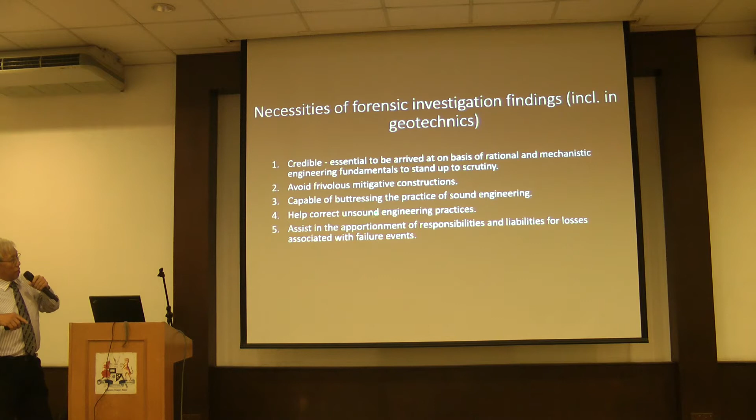Number four, you help to correct unsound engineering practices, especially established practices which seem not to result in problems earlier, but later under particular situations the practices do not seem to work. So it's time for further studies and understanding.

And number five is to assist in the apportionment of responsibilities and liabilities for losses associated with the failure events. For instance, if you are an owner of a facility, a house buyer or something like that, and your house experiences problems, you want to look for people to pay for the repairs.

In most cases, at the moment, I think a lot of people will just blame the contractors, but you have to understand that the contractor's work, before he's paid, has to be accepted as advised or certified by the supervising consultant. So actually, at the end of the day, it's the project consultant who's actually liable.

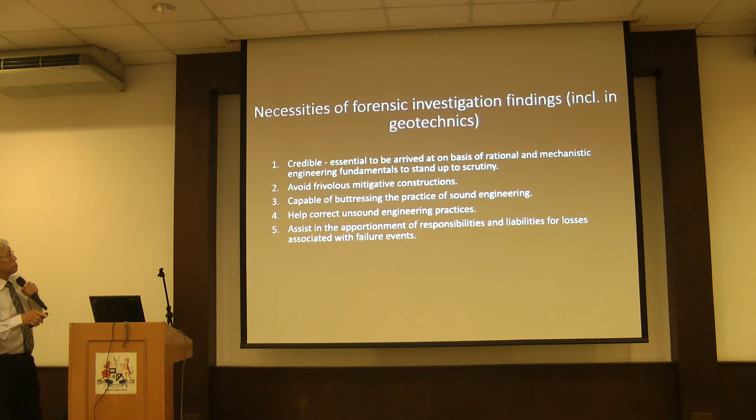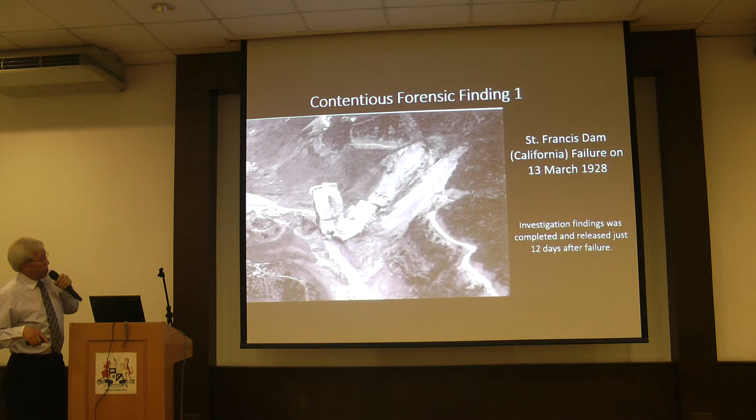So we go to contentious forensic findings. There are quite a number of them in the literature. Now, number one is the St. Francis Dam in California. It failed on the 13th March 1928. Now, interestingly, the investigation findings were completed and released just 12 days after the failure.

And this is a bit of the specifics on the dam. It was a 60 meters high concrete arch dam and collapsed soon after full impoundment. That means as soon as the water level approached the maximum reservoir level, it collapsed. And number two, failure was blamed on piping and erosion in the conglomerate foundations.

Now it's recorded that soon after this collapse, the geologists came along and they were very, very happy to find that there was conglomerate on your left-hand side and the ground was schist on the right-hand side. So conveniently, they said that it was piping under or through the conglomerate foundations that caused the problem.

But then it wasn't until a similar dam in France, Malpasset, failed. Well, this dam failed in 1959, and it wasn't until 8 years after it failed that it was realized that uplift water pressures in the foundations cause instabilities in such dams. And following that, the engineering philosophy for the design of concrete arch dams was thoroughly revised.

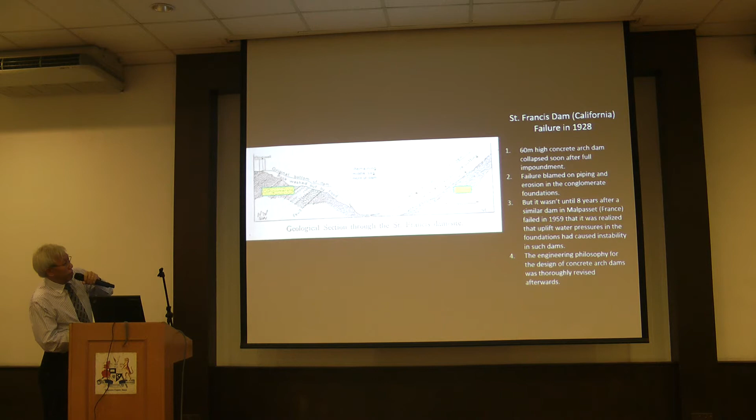So that's a benefit of that failure. But it took 30 years plus 8, so almost 40 years before they realized the fault.

Now, number 2 contentious forensic finding is the Carsington Dam failure in 1984. It was a 30 meters high earth dam, and it had a very interesting clay core geometry. This is a clay core. Normally, clay cores would just come down vertically and stop there. So this had an extra feature here, which was considered unusual.

Now, it failed on the upstream side, as the embankment was about to be completed. So it wasn't filled with water. So this is the upstream side. This is the reservoir downstream. And as you can see here, the upstream side is supposed to have a flatter slope.

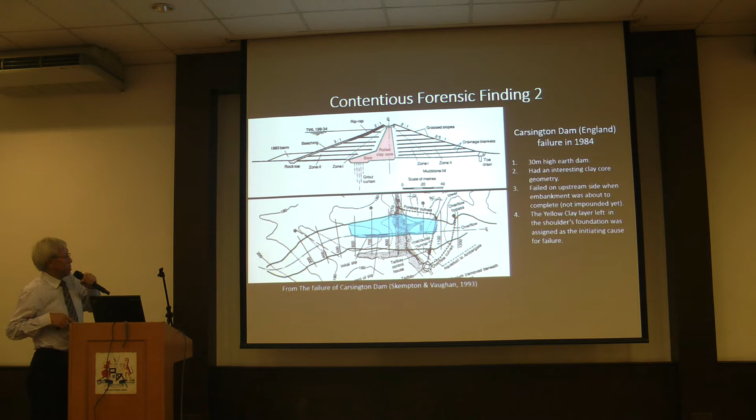And this is a plan of the failure. So this would have been the lowest point in that river which the dam was blocking or damming up. It's over 400 meters, almost half a kilometer length of failure. So as usual, there was a very comprehensive investigation, and everybody who was interested gave their piece of opinion.

Now, the findings said that the yellow clay that was left in the foundations was the cause of the problem. But the thing was, the yellow clay was removed at the axis of the dam, at the highest point or lowest point in the river, and failure also occurred there. Number 2, it did not fail on the steeper downstream side, even though the yellow clay was also present.

Now, I suppose anybody would be able to come to a conclusion that this feature in the core was the cause of the problem. But the people who were officially engaged to do the investigation never mentioned this. However, because of the great interest among the academics, we in industry also benefited. Now, the result of that activity was improved computational capabilities available to everyday practicing engineers like me and you.

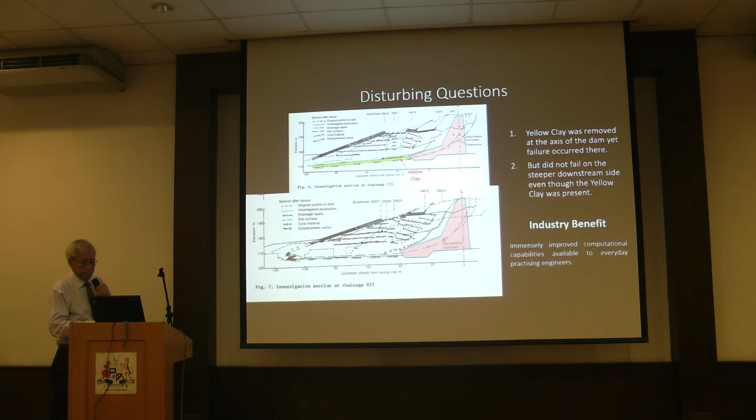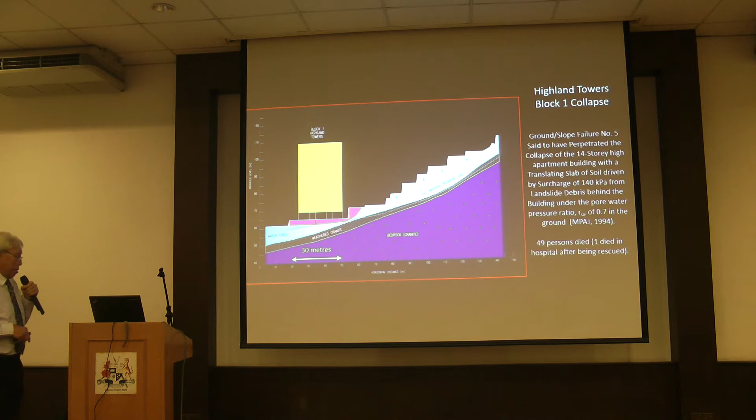I found that rather fascinating that they could come up with something like that, so I did my own little analysis. So this translating slab of soil is that little pink thing, and the surcharge load of 140 kPa is at the back here. Now if you're into soil mechanics, you know that the surcharge would generate an active earth pressure trying to push this slab of soil, and this slab of soil will be resisted by friction at the base of the slab.

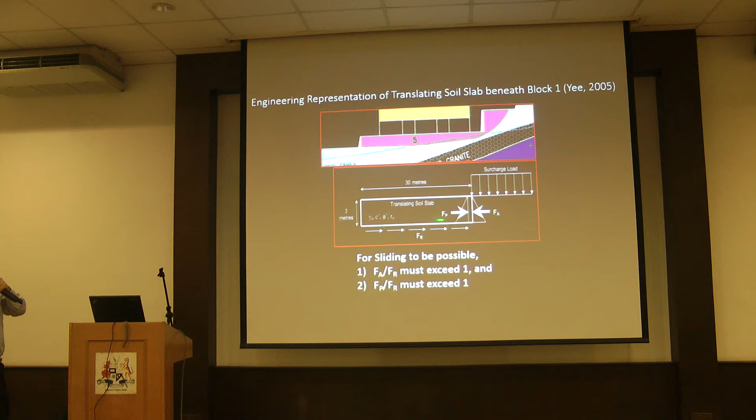Now, whether the driving force can transmit to this slab a force high enough to cause it to slide will depend on whether there is sufficient passive force capacity within the sliding slab, which means that for sliding to be possible, FA, the driving force, must exceed the resisting capacity, and FP, which is the absorbing force, must also exceed the resisting capacity. So these two quantities must exceed 1.

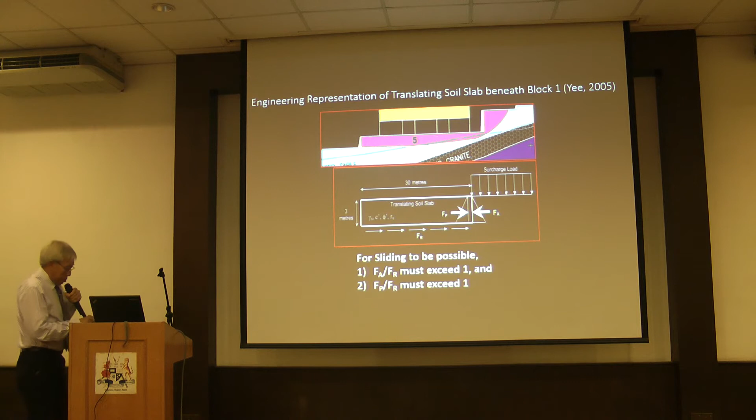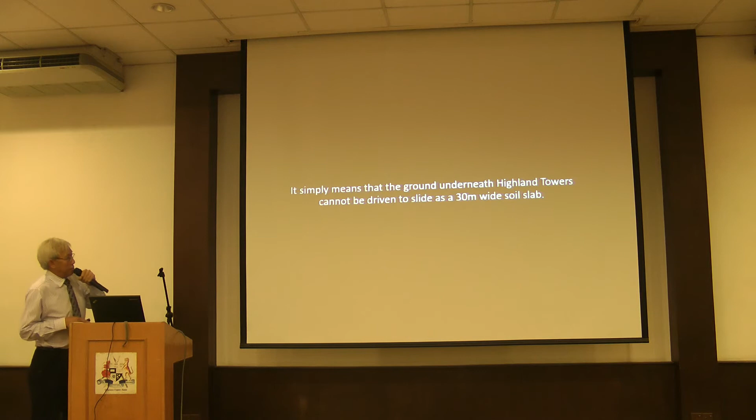Now you go through the mathematics, you find that this is the ratio of 1. So for that mode of failure to be possible, that ratio must be above this red line. And you find that there's no possibility for that to happen, because as your soil friction angle rises, the active force that you can generate from the surcharge keeps reducing. Although under certain circumstances the passive capacity can increase until the ratio exceeds 1, the driving force ratio cannot. So it simply means that the ground underneath Highland Towers cannot be driven to slide as a 30-meter wide soil slab.

Now this is a real-life slope failure which took place 4.5 years ago. And this ground translation or heave did not reach the buildings 16 meters away. These buildings are 16 meters away from the toe of the slope.

Okay. And during investigations, we had this, how do I play this? Oh, can you go back one? I meant to play the video.

Now, when we drilled a borehole at the foot of the slope after the debris was cleared, we had this 5.6 meter water jet that shot out of the ground. And this happened at a depth of about 10 meters below the ground surface here. Now we go through the mathematics, we work out that the RU or pore water pressure ratio was about 0.7, identical to what was said to have happened at Highland Tower that caused the collapse of Highland Towers.

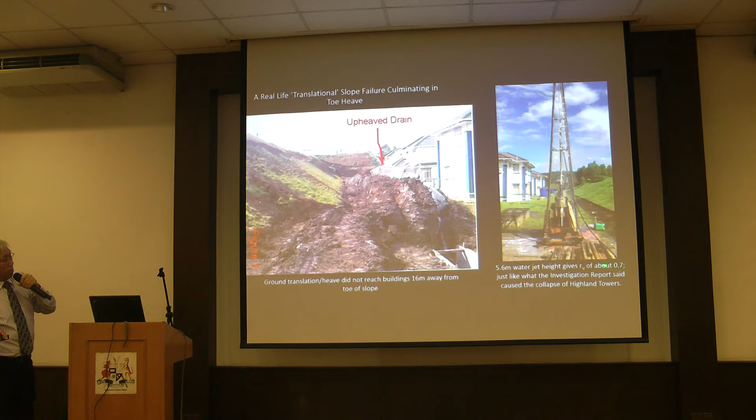So you can see that this is a real situation where the RU pore pressure ratio was actually 0.7, and the damaged ground was only about 10 meters. And this height of slope is 23 meters. We'll come back to that later.

Now I want to provide you some records of what I've done. This is case history number 1. It relates to a collapse of a counterfort retaining wall. Now the geometry of the works that was taking place just before it collapsed is shown in this diagram here.

Some details: the retaining wall was constructed in 1978, ironically about the same time as Block 1 of Highland Towers, and it collapsed just 3 hours before Highland Towers did on the same day.

Looking at this geometry, it would have been tempting to conclude that the subsequent excavation, happening here because they were going to build a new house, had undermined the retaining wall and the slope, causing its collapse. You can see that earlier this ground continued down to here, and for the construction of the new house, they carved away this bottom bit of the slope.

However, it was considered necessary to ascertain if the wall failed in that straightforward manner, because it had been undermined.

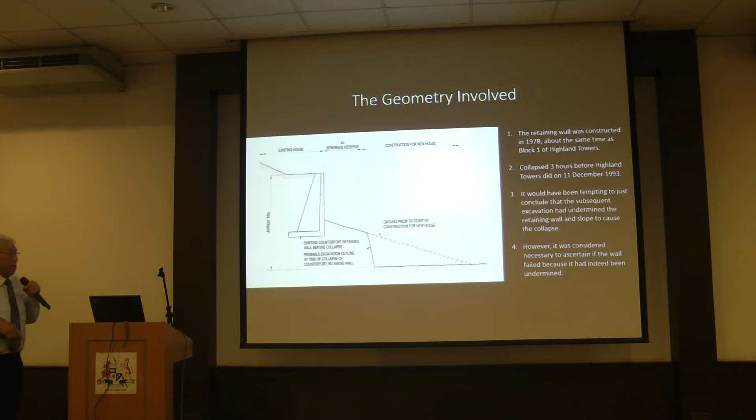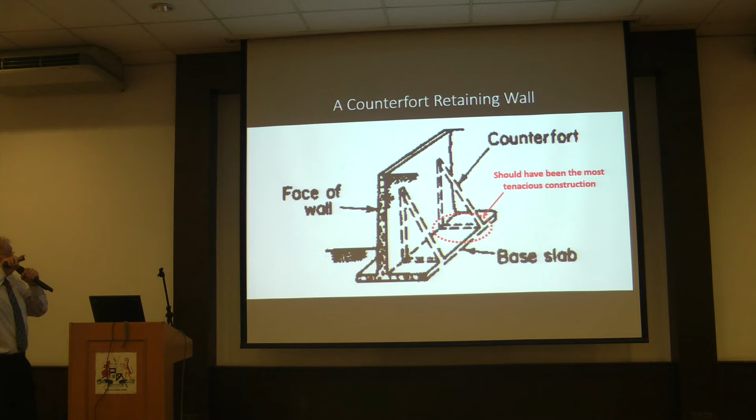Now this is a counterfort wall. Not a very common construction, but it has been used. So this is the wall stem, or face of the wall stem. The retained ground is here, and the lower ground is on this side. These ribs are what we call the counterfort. With this construction, we can get away with a thinner wall stem or wall face.

I marked in red there - that connection should have been the most tenacious construction, or the most strongly connected place in this wall.

So when we investigated we decided to have a look at the base of the counterfort. As I said earlier, in counterfort wall construction, the connection between the counterfort and the base slab must necessarily be the most tenacious, meaning the strongest. When we carried out physical examination, we found that the counterfort had detached from the base slab.

So we excavated down. This is the counterfort behind here, and that's the bottom of the counterfort. This must have been the thickness of the depth of the base slab where it slipped off. The reinforcement, as you can see here, is rather light. So this is the sketch of the counterfort, details of the bottom of the counterfort wall structure that we managed to record.

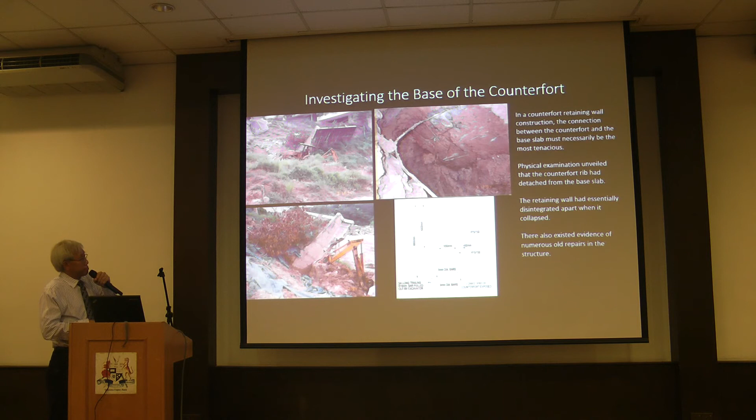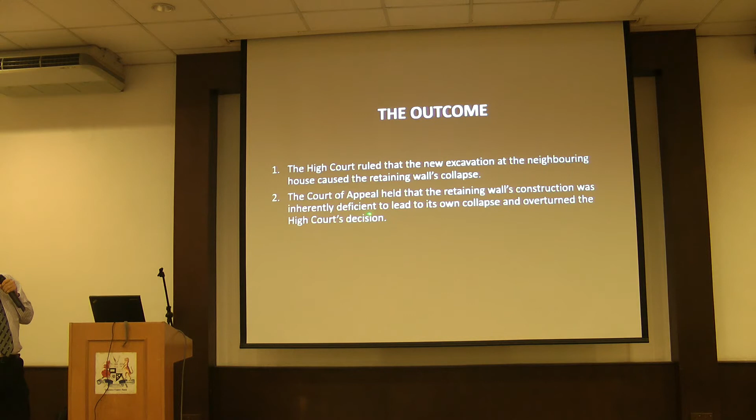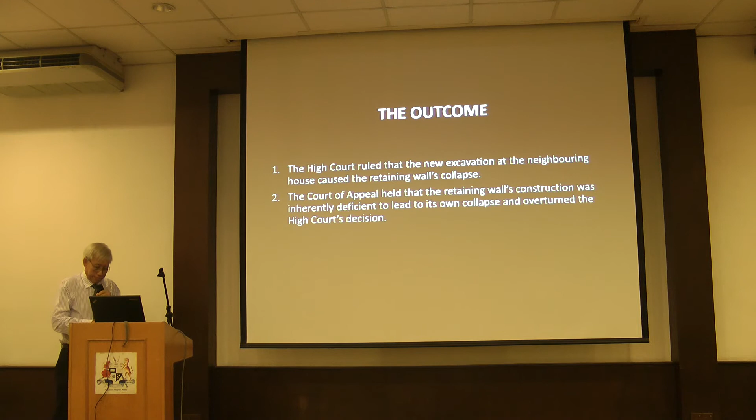The outcome of this investigation is rather interesting. We went to court. The High Court ruled that the new excavation at the neighboring house caused the retaining wall's collapse. I think that's the tendency for almost everybody to arrive at that view. But this court case went further to appeal, and the Court of Appeal held that the retaining wall's construction was inherently deficient, and therefore led to its own collapse. The Court of Appeal reversed the High Court's decision. So I was very happy with that.

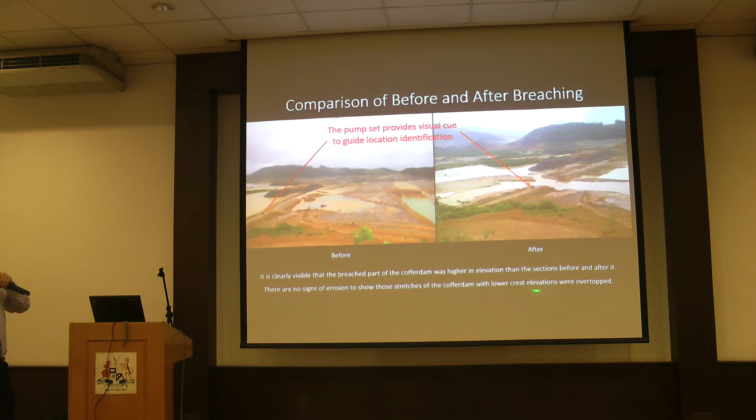Furthermore, if you look at the photographs available after the breach, there are no signs of erosion to show that these stretches of cofferdam with lower crest elevations were overtopped. So it's quite a mystery.

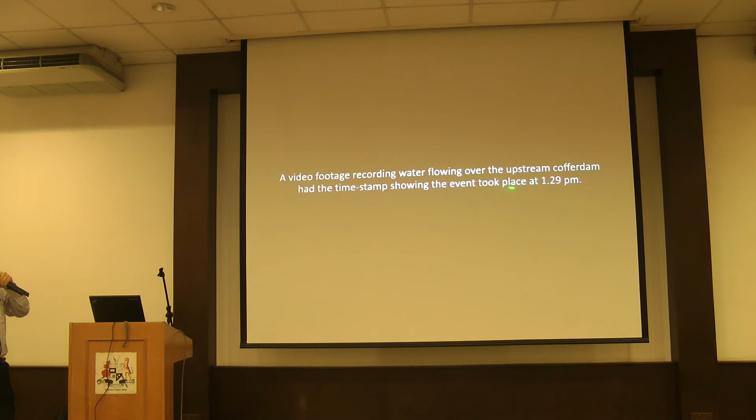We are lucky that in these days of smartphones and phones with cameras, somebody made a video recording showing water flowing over the upstream cofferdam, and it also had a timestamp showing that the event took place at around 1:20 or 1:30 p.m. midday.

Now we could ask a lot of questions. We had to try to establish the flood level when the water was recorded flowing over the coffer dam at about 1:30 p.m. The site supervisor who was in charge of securing the fuel storage tanks on the reservoir side told us that the flood water was rising calmly and steadily since he took up the station at about 8:30 a.m.

At that moment in time, the water level was about 3.8 meters below the highest point on the coffer dam. I have to apologize for being so cryptic with these details because I expect this case to go to court, and for that reason I'm not allowed to keep a recording of my presentation file. But just for your ears, I'm telling you the story.

So I'm using the highest point on the coffer dam as the point of reference for all my elevations from now on. The flood reached the storage tank floor corresponding to a level of about 1.8 meters below the highest point on the coffer dam at about 4:45, almost 5 p.m.

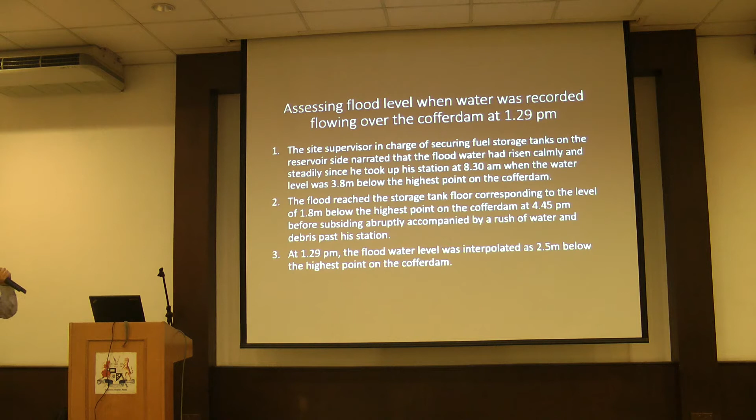So if we do a rough interpolation, at about 1:30 p.m. the flood water level would have been about 2.5 meters below the highest point on the coffer dam. And if it's about 2.5, it would be about 0.7 meters lower than the highest water level, and yet the coffer dam was overtopped at that time at a low water level.

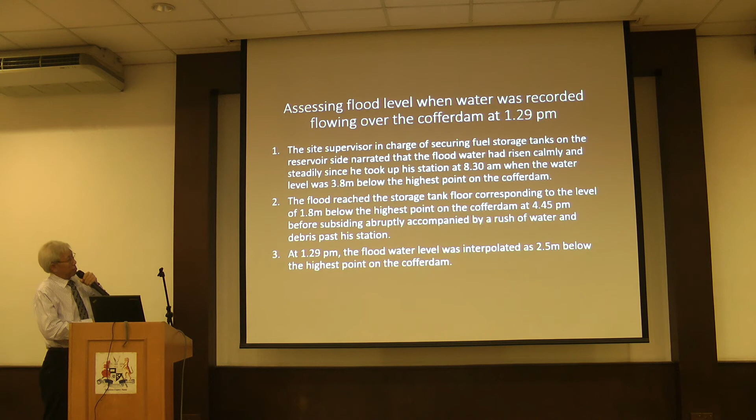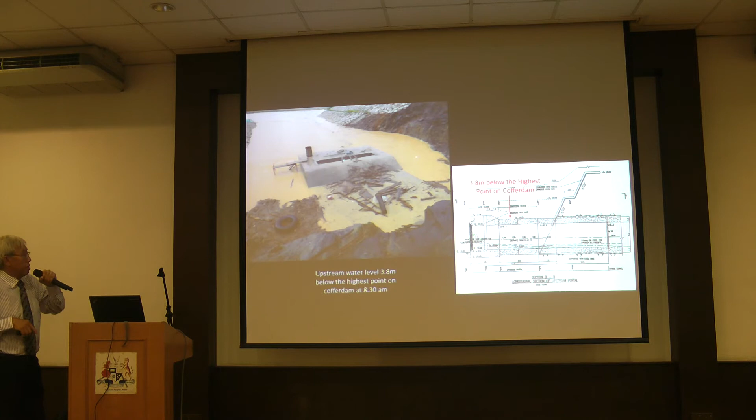So we know that at 8:30 a.m. the flood water was 3.8 meters below the highest point of the dam. Now, I'm sure for most of you in the same business as I am will know that record keeping for construction in this country is very poor, more so for temporary works like this.

So we had a hard time trying to reconstruct or guess what was constructed for the upstream coffer dam. After going through construction records, actually excavation records, with survey data that the contractor prepared for their progress claims, we were able to establish what I think is a pretty good enough estimate of what was constructed.

So the downstream side of the coffer dam, or the dam, is on here, and they were doing foundation excavation or preparation on the downstream side of the coffer dam. These are the upstream side. So we think that they constructed something like this.

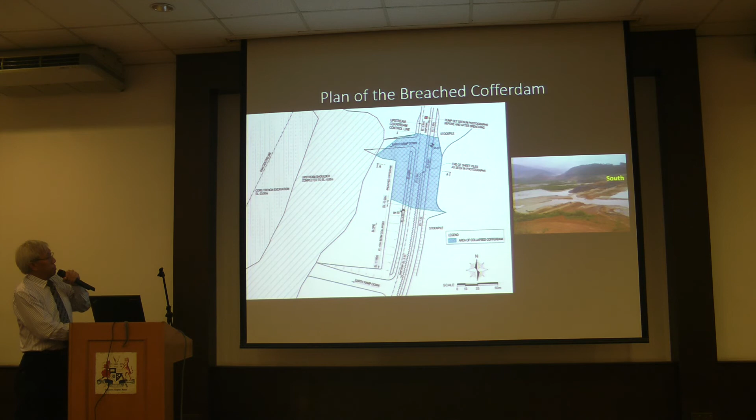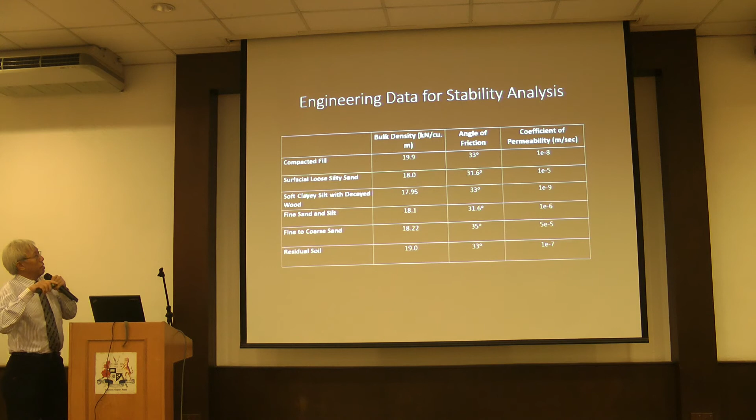We were not able to get absolute information from the site records. So from this, and material data or test data from materials we collected from boreholes after the breaching, we got all these numbers, and we were able to put these numbers into stability analysis and establish that the structure had indeed collapsed.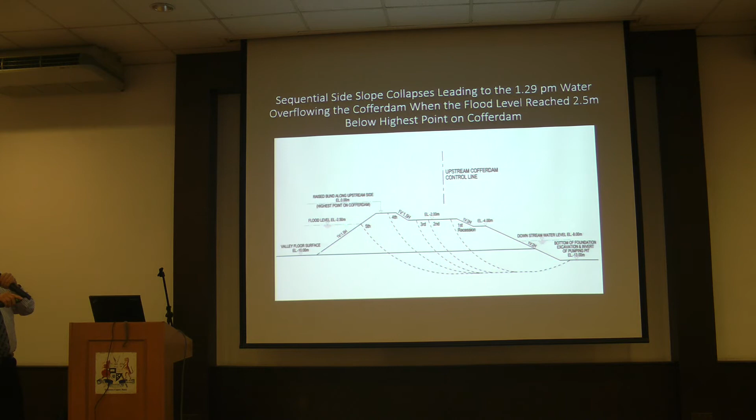And I believe that was the point in time when this person recorded a video to show that the coffer dam was being overtopped by flood waters.

Now after the breach, they went back to do some repair works or retrofitting works. This is the south end section. There's a north.

Before the breach, this sheet pile cut-off wall stopped here, and that's why you saw the bent or deflected sheet piles in the earlier photograph. Now in the repairs, they continued sheet piles over here, further north.

Now the outcome of the investigation was that the part of the cofferdam embankment without a sheet pile cut-off wall suffered a sequence of collapses in its slope on the downstream side as the flood was rising. And the flood water had streamed over the cofferdam when the embankment crest dropped below the flood level.

Now you know not to accept the words of contractors.

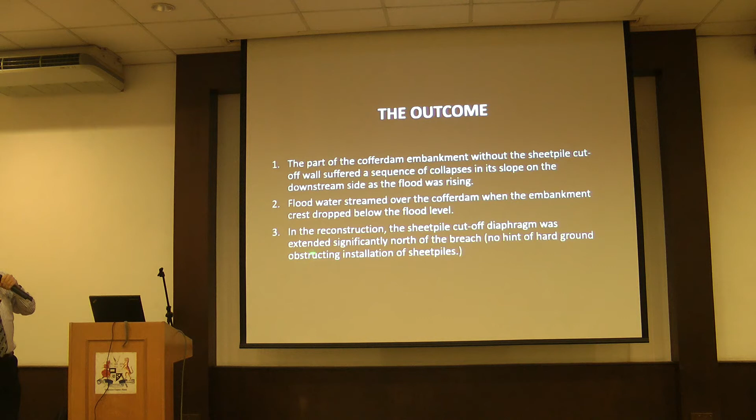Now in the reconstruction, the sheet pile cut-off diaphragm was extended significantly north of the breach. They were able to do that, which shows that there was no hard ground obstructing the installation of sheet piles previously. So in short, we may say that the contractors had shortchanged in the beginning.

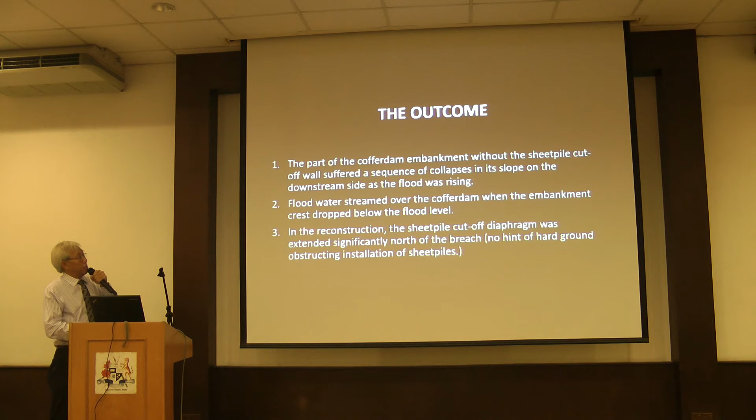Case number 3 is about sinkholes in the back of wharf roadway.

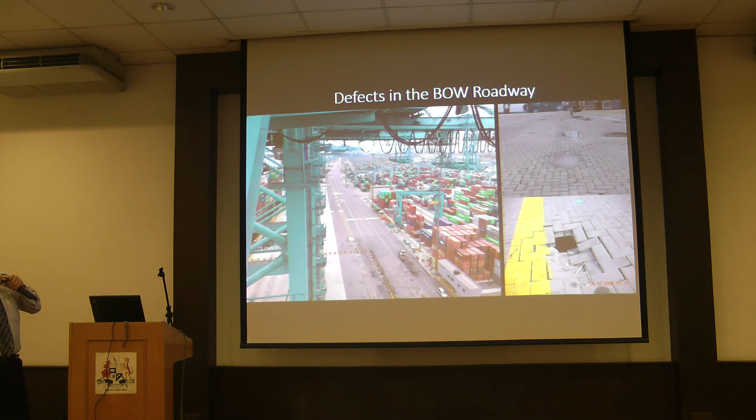This picture shows the defects in the back of wharf. The wharf is over here, the sea is over this side, container stacking yard is over here. So you see depressions in the roadway, you can see sinkholes in the roadway. This would have been potentially a professional indemnity insurance claim.

This is the cross-section of the roadway at the back of wharf. This is a wharf structure with a drop panel wharf deck here. This is the sea here. It had an interesting revetment cover to the slope.

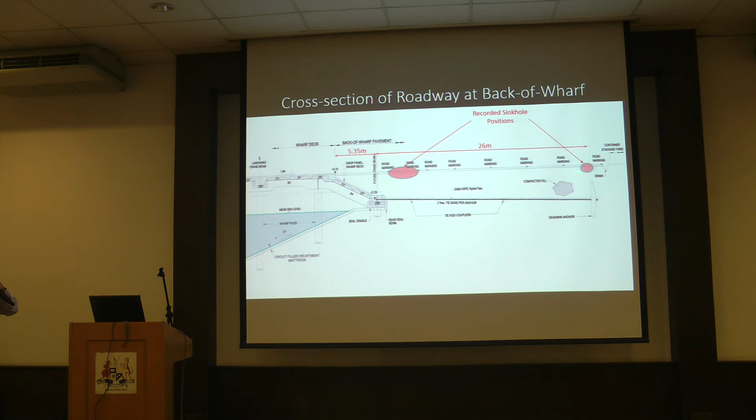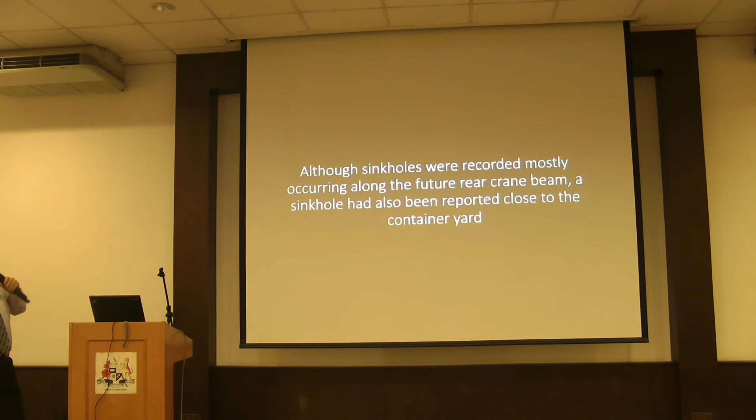I marked in here recorded sinkhole positions, mostly right behind this future crane beam here. And interestingly, there's one recorded far end. So although the sinkholes were recorded mostly occurring along the future rear crane beam, a sinkhole had also been reported close to the container yard as shown in the earlier diagram.

So this is a sinkhole investigation process, pictures of which I was given. When I was involved, all this work had been finished because this took place in 2006 and I only got involved in 2011, 5 years after.

So you can see a sinkhole with a man inside. And they excavated, chased down the sinkhole, down the cable bank. They noted voids under the cable bank. And they continued until they arrived at the tie rods, and they found that the sinkhole chimney stopped immediately below the tie rod. That means the sinkhole did not proceed below the tie rod level.

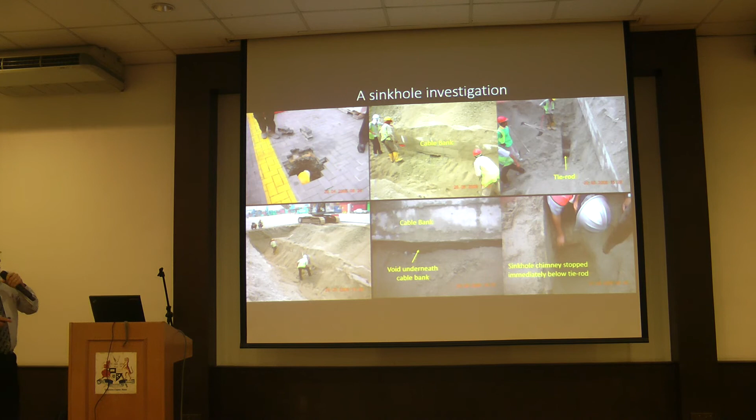There are 3 consulting engineering companies who provided findings on what caused the problems. This was 5 years earlier.

I use this naming system. I'm sure you are familiar now with the 1MDB case where the Department of Justice of the United States of America referred to individuals as Malaysian official 1 or 1MDB officer number 1 and things like that. So I don't claim to have invented this system, but it so happened to coincide.

Now, engineer number 1 was the design and supervision consultant for the wharf structure and development construction. The port operator wanted to make engineer number 1 liable for faulty design of the slope revetment mattress. So you realize that if you are going to practice as a consulting engineer who is supervising, it's a very heavy burden to carry. You can be liable for these sort of things.

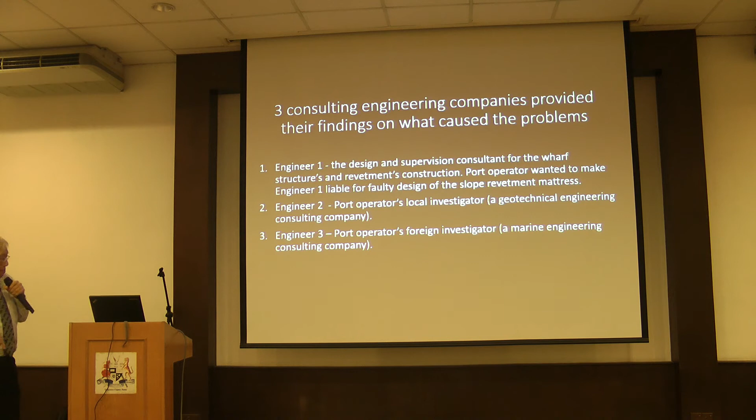I summarize here engineer number 1's statements. Number 1, he said that the wheel path ruts were the result of dynamic compaction by passage of heavy haulage traffic, that is the port traffic. Of course, he's right to say that the port operated very heavy vehicles, but the port should have been designed and constructed to cater for these sort of things.

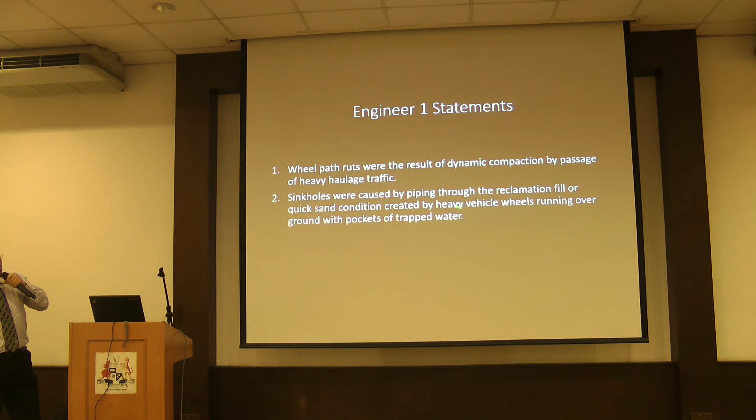Number 2, he said that sinkholes are caused by piping through the reclamation fill or a quicksand condition created by heavy vehicle wheels running over the ground with pockets of water.

And then engineer number 2 said this: the connection detail between the revetment mattress and the crane beam was improper, and it led to loss of ground from the back of wharf during tidal changes to cause sinkholes. And he provided evidence that sand deposits were present on top of revetment, and he used this as proof to support that statement.

Number 3, this is a very dramatic statement. He said that sand deposition was so severe as to have formed a beach-like condition on the revetment.

Number 4, they said that the impervious revetment mattress was prone to uplift and sliding during receding tides. That means after the tide reached its highest, then when the tide dropped, the impervious revetment mattress was prone to uplifting because of trapped high water pressures underneath the mattress, and was sliding during receding tides. And he also said leakage of ground into underground drainage structures also led to the sinkholes.

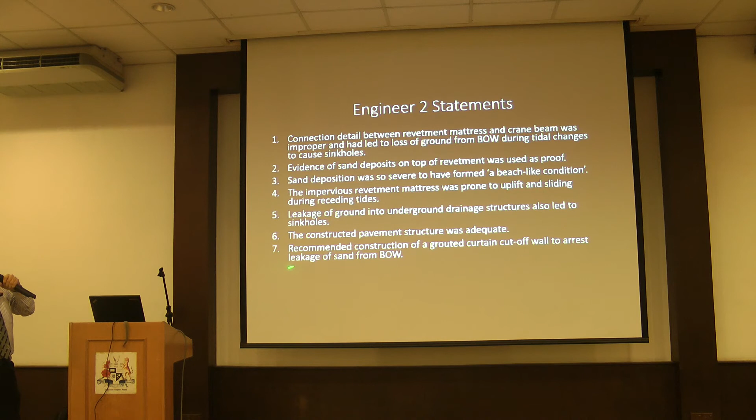All I can say is there might have been an element of conflict of interest by engineer number 2. Number 7, he recommended the construction of a grouted curtain wall to arrest leakage of sand from the back of wharf. Just like what people doing dams do.

Engineer number 3 statements, he said that terminating the top end of the revetment mattress low into the tidal region resulted in high water head reverses to drive sand out to the slope surface. Number 2, he said that pavement defects were due to silt content higher than specification limits in the sand bedding through the paving blocks and reclamation fill. These paving blocks are the interlocking blockwork pavements that was used for the port pavement.

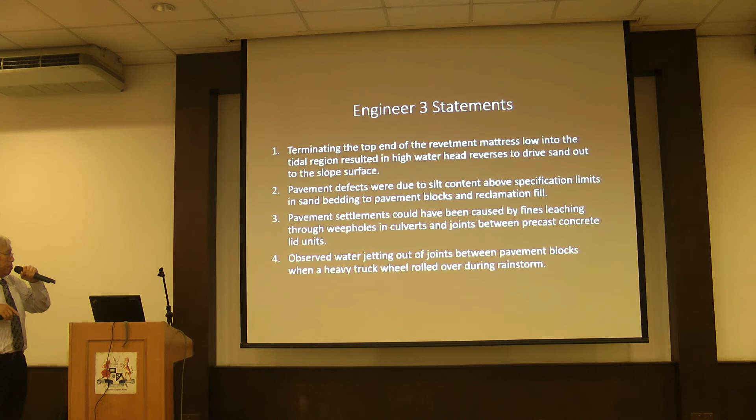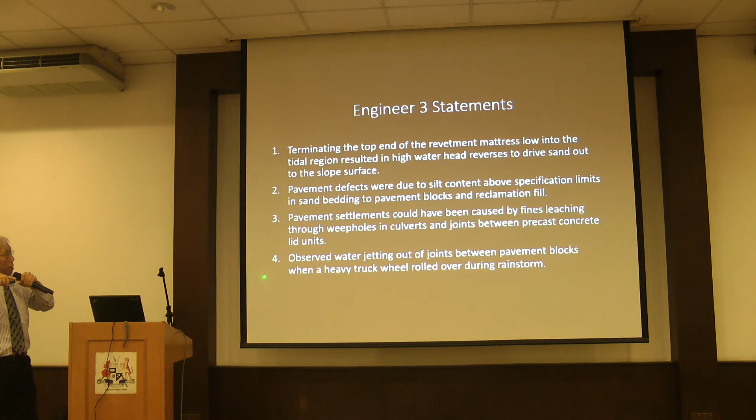And number 3, pavement settlements could have been caused by fines leaching through weep holes in culverts and joints between precast concrete lid units. Number 4, he recorded observing water jetting out of joints between pavement blocks when a heavy truck wheel rolled over during a rainstorm.

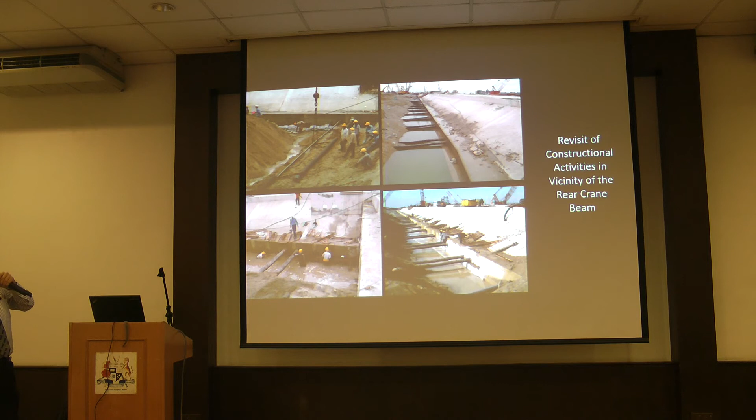So to find out the cause for the formation of sinkholes, I thought it's useful to look at the construction activities or history along the back of the wharf. So what we found was they had these trenches dug and left in place to construct these tie rods, and also this little bit of concreting work at the end. So you can see this deep trench here, and after completion of all this it was backfilled. The ground further back was already filled up to completion.

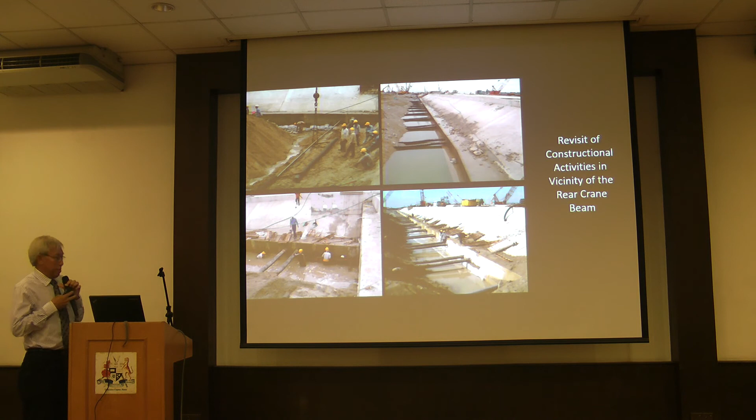When you see this sort of scenario, it's not hard to imagine that the backfilling here was just tipped over. So to tie all these bits and pieces together, we found that first, sinkholes that were chased down the chimneys did not proceed below the tie rod. This is the tie rod. And this was the sort of excavation that was created to complete this bit of work here.

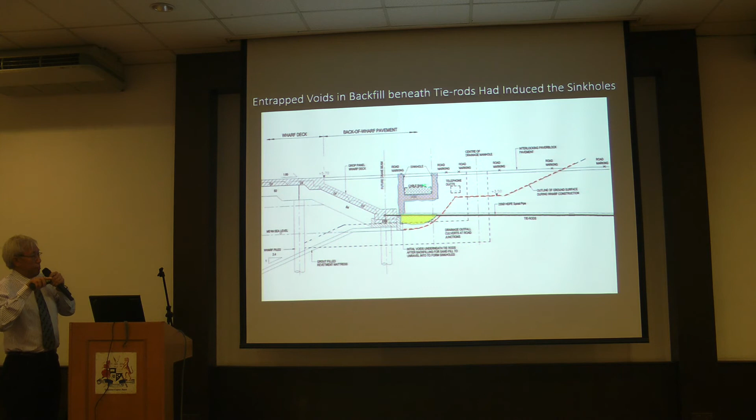So you can surmise that during backfilling, the region below the tie rods was left hollow. And these tie rods, although the steel diameter is not big, had this enormous HDPE sheath, very big diameter HDPE sheath. So it sort of obstructed the flow of backfill down. And this was the only understanding that we could come up with to explain why the sinkholes never appeared again after they were filled up.

And certainly if you had filled back this sinkhole, and the process of reclamation sand being washed out had continued, these sinkholes would recur at the same position. So it did not.

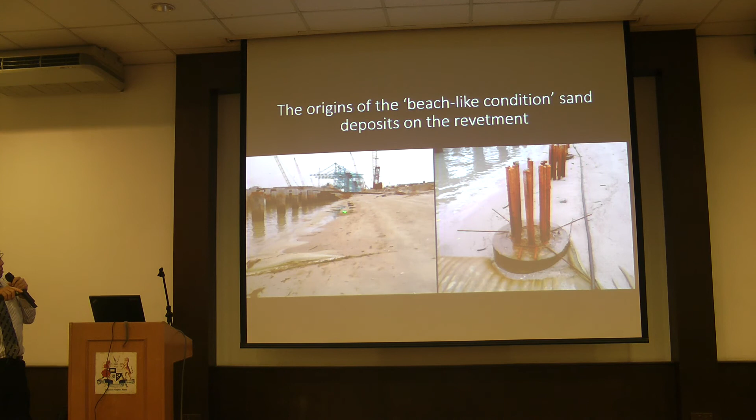We also liked to find out why the beach-like sand deposits occurred on the revetment. Now, we went back to archive photographs and found that this is a drop panel. This would have been the line of the future crane beam here. And the sinkholes were happening here. And this region would have been under that drop panel here. You see all these sand deposits that were already there before the deck was put in.

This is a closer look. This is a row of piles that's along here. So the beach-like sand deposits came about because of this. The outcome from that investigation was the sinkholes in the back of the wharf did not result from the loss of sand, but were the consequence of voids left in the backfill underneath the tie rods.

So the postulations of sand leaking from the back of the wharf were frivolous as far as I'm concerned, as their investigations were made and concluded without consideration of the construction processes involved. All those investigators never went to look back at what was going on during construction.

So the grouted curtain cut-off wall proposal made by engineer number 2 was abandoned and not constructed. Now, the happy ending was the port operator discontinued its claim against engineer number 1 for faulty design of the revetment work.

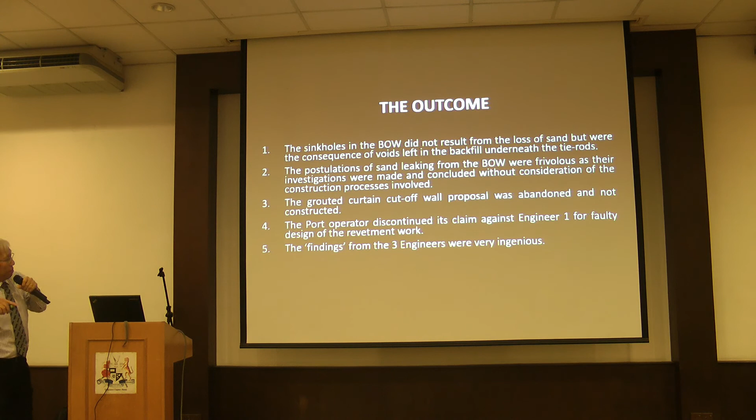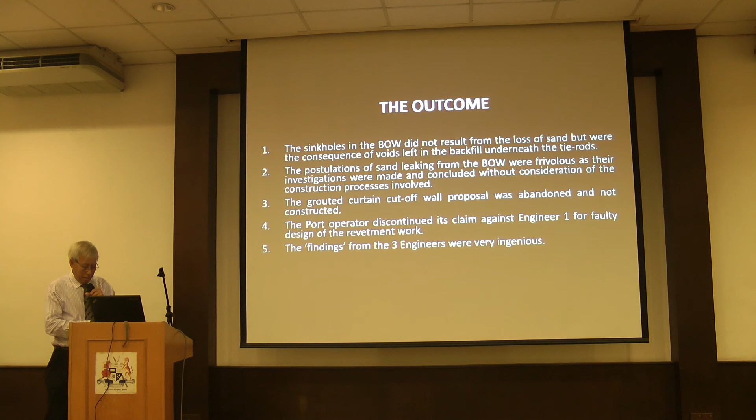And I must say the findings from the 3 engineers were very ingenious. So that's the end of my presentation during the conference. Since we have time, I've got some more to show you.

So this is the diagram provided to me to say what was constructed for the embankment. The red one was the as-designed geometry, and in green was what they produced from their post-failure surveys. And interestingly, in the embankment they had all these drainage blankets here, and a rock-filled toe.

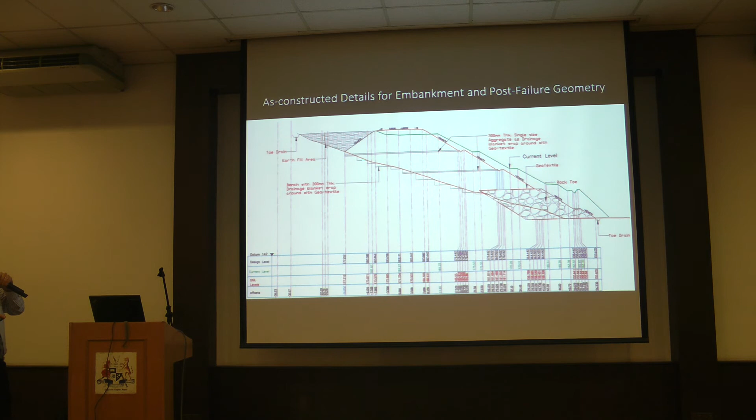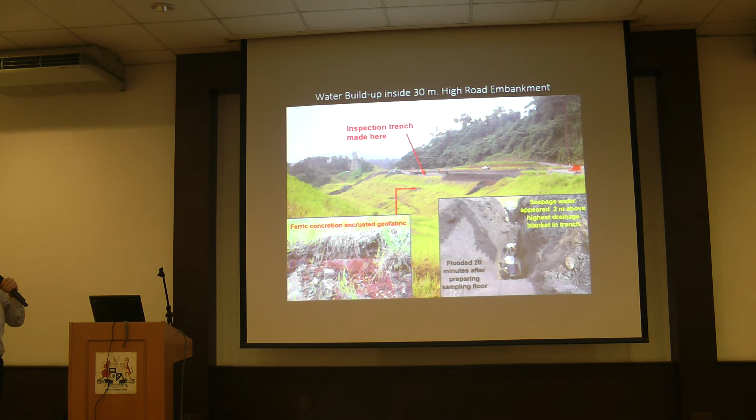And when we reached the sampling floor, in about 20 minutes, the sampling floor was completely flooded. So you can imagine there was quite a lot of water coming in, which surprisingly the drainage blanket was not dealing with.

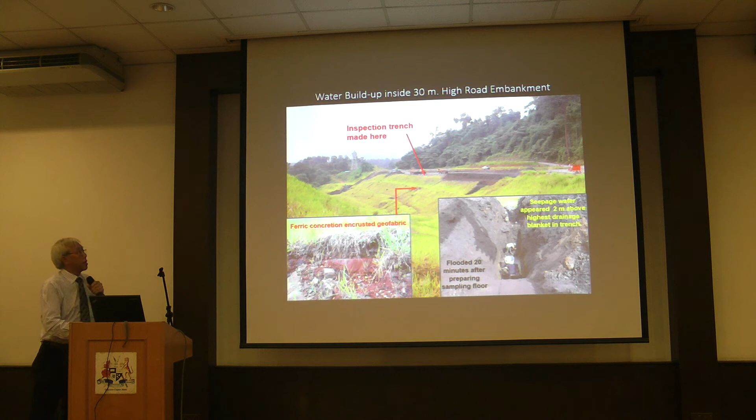Sinkholes and swallow holes in earthworks. Are there any geologists in the audience? If you are a geologist, please put out your hand. I won't scold you. The reason why I ask is geologists always claim that sinkholes are their exclusive domain, and sinkholes are only associated with limestone bedrocks.

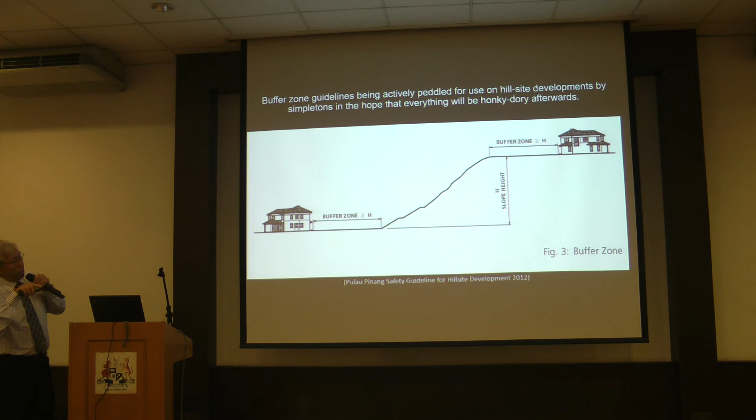So they try to do things like this to force developers and submitting engineers to comply with. So, used by simpletons in the hope that everything would be rosy afterwards. So they are promoting things like, if this is the height of the slope, we cannot have any buildings within a distance equal to or less than the height of the slope, and also on top of the slope, same thing.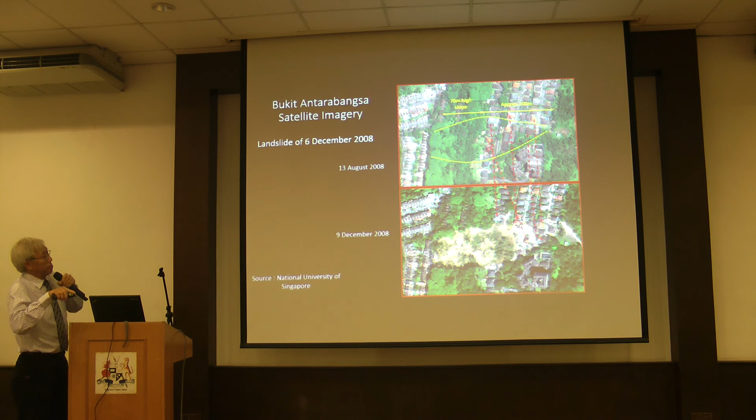You see that the distance, this is about 200 meters from the toe of the slope to the last house here. And this slope is 70 meters high. So you see the carnage extended all the way until close to the front of the last house.

Like I said earlier, I apologize for the projector, it's not very good.

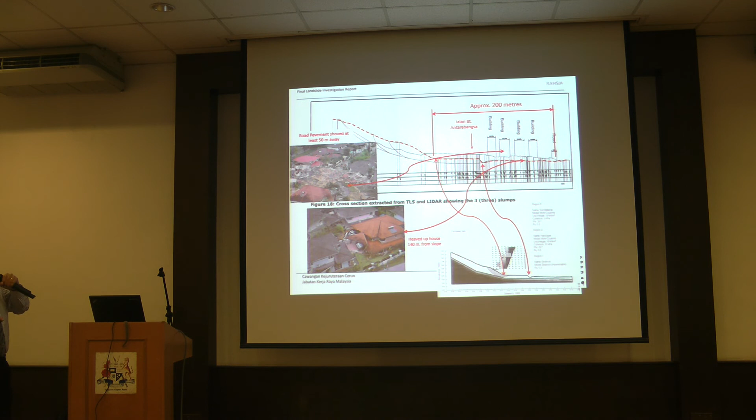So the point is, if you were to implement the buffer zone required, 70 meters slope height, it means that the landslide runout would only reach about 70 meters, so that if you have your buildings beyond that, you would not be affected by a landslide. But in this case, you can see that landslide runout far exceeded 70 meters.

I showed this photograph earlier. This is a 23 meters high slope, and the runout was only about 10 meters. Okay, so slope failure did not go more than half its height. So here we have one landslide that destroyed properties to a distance of almost 3 times the height of the slope, and yet we have another one that traveled less than half the height of the slope. So what's the logic in imposing buffer space?

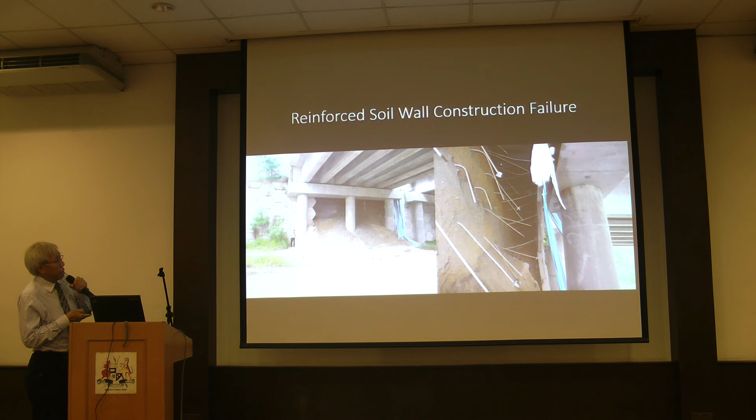I'll show you some example of a reinforced soil wall construction failure. This happened under a bridge at an apartment. So you can see that this picture is taken by standing underneath at this point. You can see all these reinforcement strips that ruptured. You can't see the connection brackets at the back of the facing wall clearly.

The next picture should show you the condition. So these are all the dismantled facing wall panels. Contrast is not very good. You can see that there's this connection bracket here that has been ripped open. The reinforcement rod should have gone in through the connection brackets with bolts at the ends, and the reinforcement rod will continue into the fill.

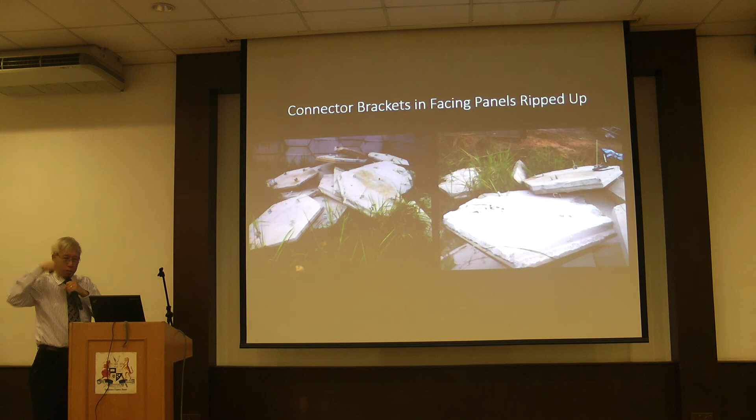I believe this is a similar problem that happened at, I think it was at Virginia State long time ago, where compacting backfill in the reinforced earth or soil construction caused overloading of these strips and the connectors.

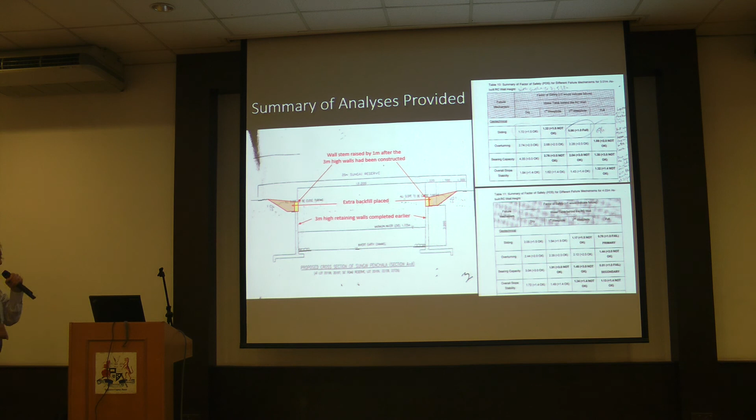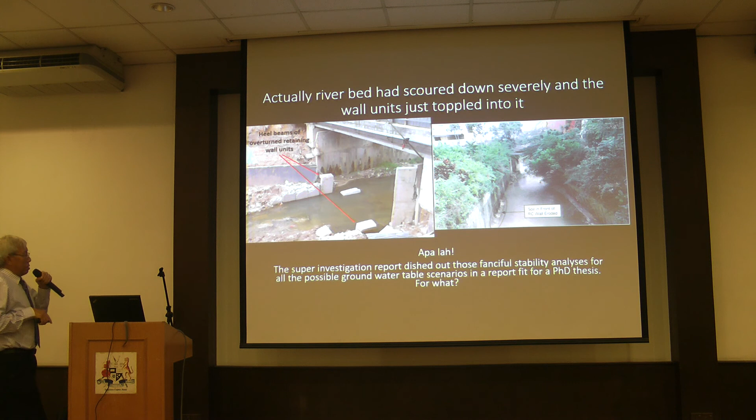To get an idea of how much the riverbed has caved, inside the water here there are these huge blocks of concrete that people use to stack up for load testing of piles, these kentledge blocks. So you can see that the kentledge blocks are submerged, sitting actually on the concrete stem of this wall that's lying down on the riverbed.

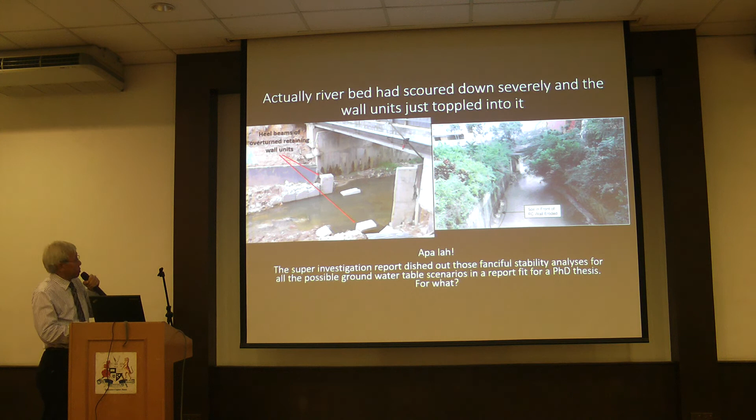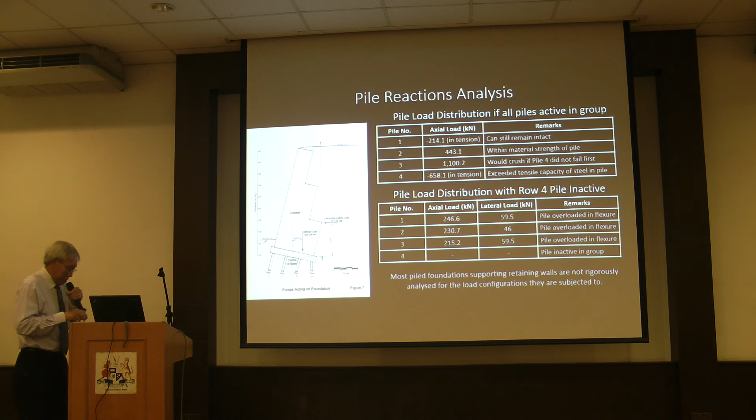This is not my view. I came across this and I was given a report prepared by somebody else. So this particular engineer, call him X, says that this raft here on top of the piles would have not been a problem. They noted that there was this soil heap in front, so he postulated that this crib wall sitting on top of this inclined raft slab slid forward and pushed them.

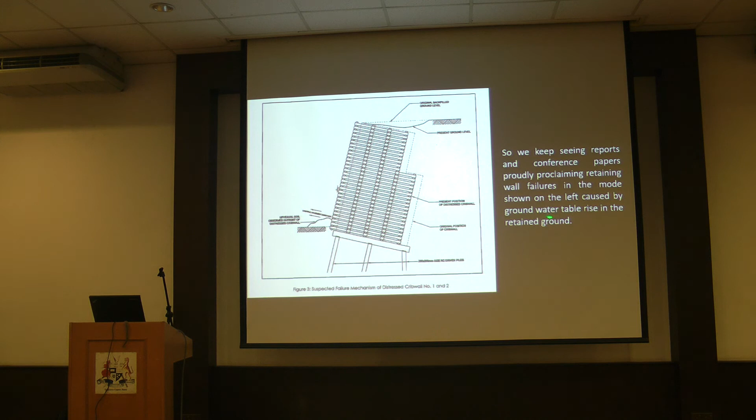Anybody think that this is sensible? Nobody? Then you're right. Yet we keep seeing reports and conference papers proudly proclaiming retaining wall failures in such a mode. Having adopted that stance, the only avenue left to explain the failure of the retaining wall would have been groundwater rise in the retained ground, which I find hard to believe. Okay.

So the same episode, this is another sorrowful retaining wall on piles. You can see that this drawing is for this. Okay, we'll look down this way in sequence. So this was a reinforced earth or soil wall just before it collapsed or failed. You can see that there's a rise here. The retaining wall had heaved up before it collapsed. Okay? And after it collapsed, of course, straightforward.

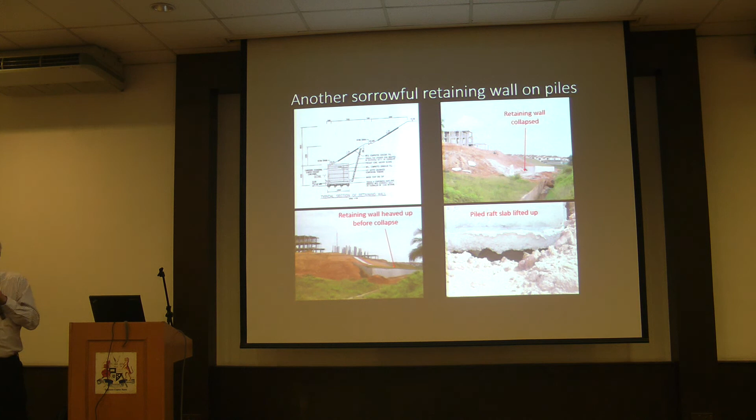But going out to site, this was observed. This is the lean concrete, this is the pile raft. So it was lifted up above the ground. Any engineer who goes to site will know that lean concrete is always poured on the ground. So in this case, the lean concrete underneath the pile raft was lifted up together with the raft slab. So it's the same mechanism that caused the failure of the earlier walls.

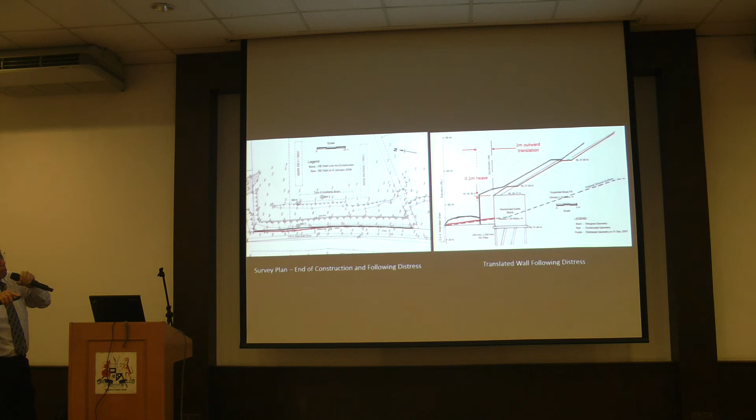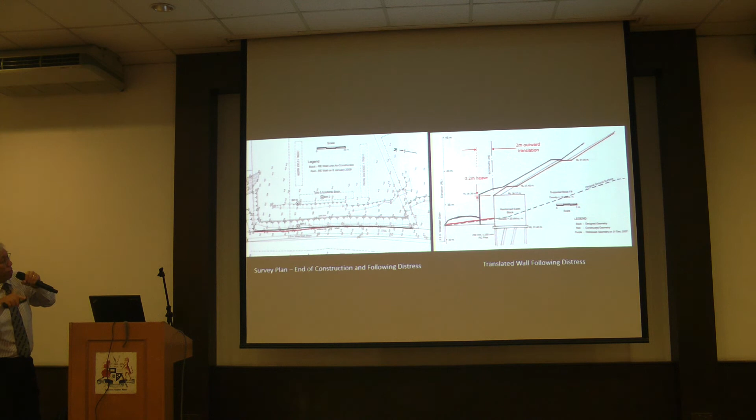So this is a survey. In black was the constructed position of the wall on plan. Red was the displaced line of the wall. In cross section, I tried to produce this. The black line was the design slope. What they constructed was the red line. And after failure, this lump of a wall moved out by a little bit more than 2 meters. And the top of the wall also moved up by about 0.2 meters. And then the ground heaved here.